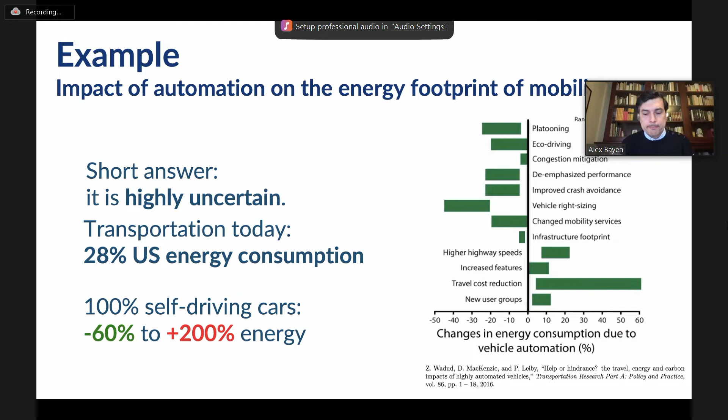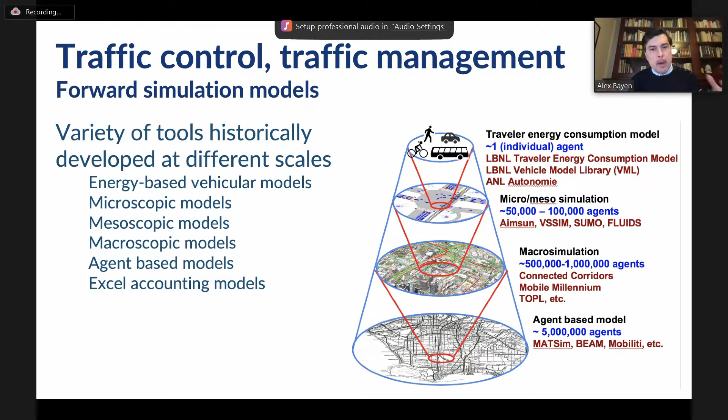The tools we use are called micro-simulation models. In this sausage-like or telescope-like diagram, you can see different levels at which you can model a city. We operate at the second level from the top, where you can do simulations containing up to maybe 50,000 or 100,000 vehicles, modeling their trajectory with acceleration and speed at a certain degree of precision, on which you can plug in energy models such as the one developed by Argonne. This is something that 12 years ago, when I last talked with this crowd, we couldn't do, because the computation wasn't there, the data wasn't there, and the modeling was still in progress. So it's relatively new, in the sense that the convergence of cloud computing, modeling, and machine learning, as you'll see in a minute, has enabled something we could not do before.

For those who haven't seen microsimulations, it's not particularly glamorous, but that's what it looks like. You can see essentially each vehicle, and the speed level, like you'd see on Google Maps. It's something which is very mature.

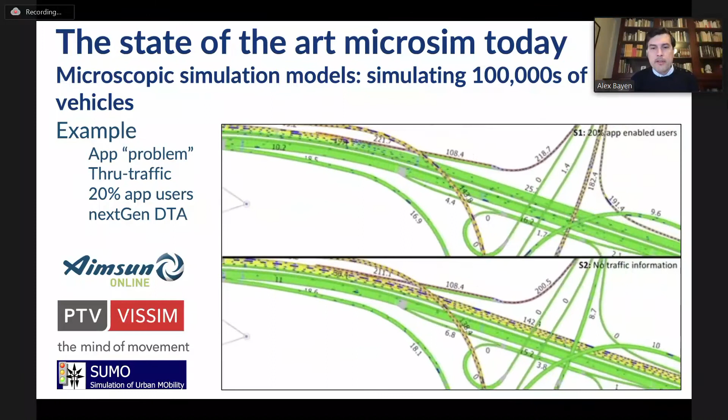There are commercial products such as Aimsun or PTV VISSIM, and open source frameworks we use like SUMO. Actually, we use two out of the three here. So this is something very mature, very established - there's 20 years of research in transportation engineering that led to the development of these tools. We take this as a commodity; we don't build them, we use them.

If you think about the big challenges of the future, data is not so much a challenge anymore, in that there's enough data now to do things we couldn't do before. There's, of course, always challenges with processing, storing, and cleaning data, but that's not really our job. There's a lot of interesting work in calibration, because even though the data is here, it doesn't mean you have all the tools to calibrate the models, and calibration of these models is actually quite hard. So there's a lot of work to be done there. Computational time is also complex, because it's okay to do a simulation with 100,000 vehicles.

But the problem is if you're going to embed that in deep reinforcement learning code, now you might need to run 100,000 simulations with 100,000 vehicles. And that is a challenge. Hence, a lot of research is happening in the field of control and deep learning with these things.

And that's, I think, where a lot of the action will be over the decade to come. So the call to action, ending this year with a large-scale experiment we're planning, is to demonstrate with a large-scale experiment involving 100 vehicles. I'll talk about this at the end. This summer in Tennessee, how concepts such as the one I'm going to derive today can be applied in practice. Now, for this, I want to dive a bit back in history.

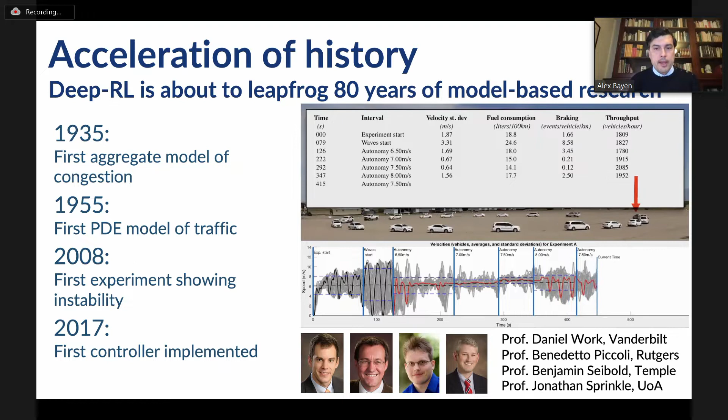So that was a turning point in our thinking, because that controller, using classical control theory, opened the gate for doing something which maybe this summer will go on the road for real.

Now, one year later, Cathy Wu, who is a professor at MIT, did this experiment in a framework called Flow that we created. She did the same ring. There's a self-driving vehicle in red. The only thing it can sense is the blue vehicle in front, and every other vehicle does what it's doing. What you see is that these oscillations are happening, and then as soon as the AV turns on the autopilot, the oscillations are removed and the ring runs smoothly.

So if you're paying attention to the presentation now, you're probably wondering, why am I showing you a simulation in 2018 when some people did an actual test in 2017? That seems like going backwards.

And the reason is: the 2017 test is a controller built on an explicit model of the cars. People went down to car dynamics, took the equations from the book, and derived the controller for it. The 2018 simulation has no model of the vehicles—it has a simulator, treating it as a black box, and it's using deep reinforcement learning to do the job. And it does exactly as good a job as the controller does.

From a historical perspective, there's been over 10,000 articles between the first traffic model and that first experiment. Then that first experiment was such a success that there was probably over 1,000 articles focused on string stability and how to shave things, leading to that fantastic experiment. But Cathy, with one article, managed to achieve the same, essentially not leveraging any of the work done in previous decades. That's a turning point, because it raises the question: what could you do with model-free machine learning? In other words, treating the system as a black box without looking inside. That was a pivotal time for us, and that's when this project started.

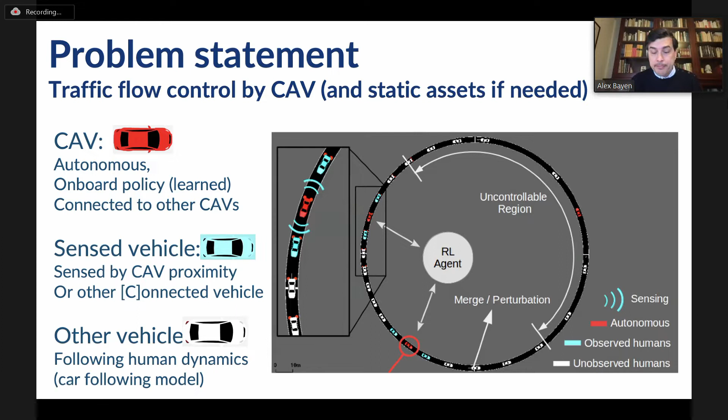We tried to see if we could generalize this. Here's an example where we figured out whether we could use the same algorithm to stabilize a double ring. It's interesting what it's learning to do here: the algorithm is learning to be a real jerk, essentially preventing cars from behind from passing by switching lanes. But that does the trick—it does stabilize the double ring.

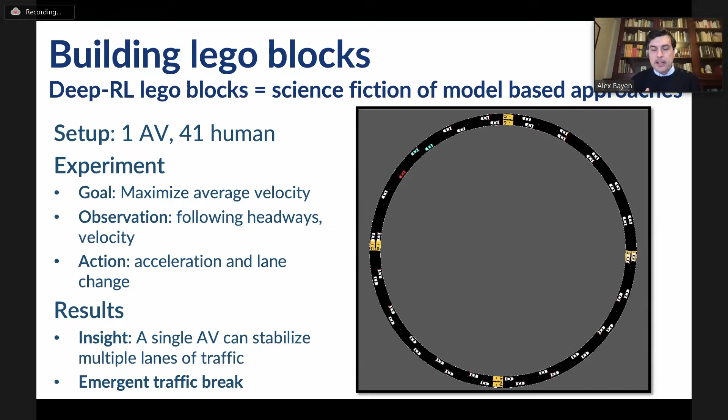You could say, what's the big deal? This is something you learn in police academy. In France we call this a snail operation—I don't know if it has a name here as well. It's a way to slow down traffic. But it's cool to see that the machine learning learned it.

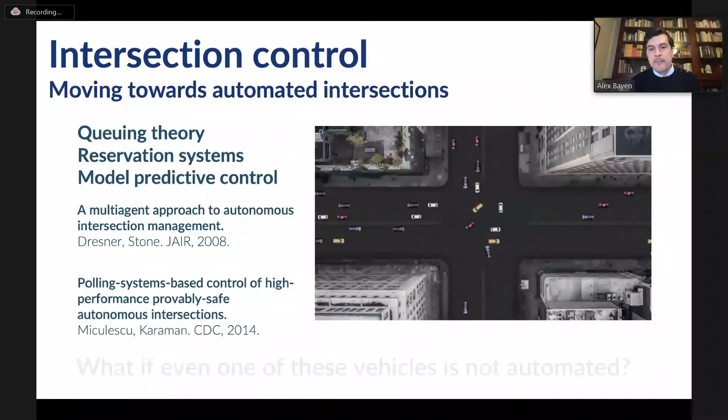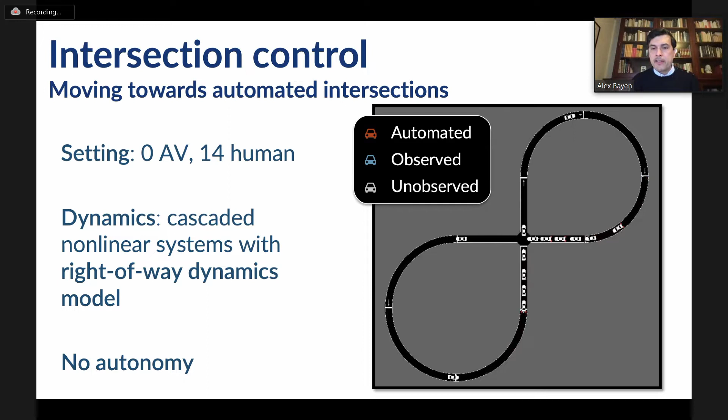Another interesting thing is if you try this setting where vehicles use the kind of California politeness stop approach to an intersection, letting the other person go when they come first—that's the worst possible way to manage an intersection, both from a throughput perspective and an energy perspective, because you stop and go. Here what the algorithm does is interesting: it learns how to pick up the right speed so that the length of the snake created by the platoon is exactly half the length of the loop, and by that it can go as fast as possible without stopping. That's another thing the system learned without a model.

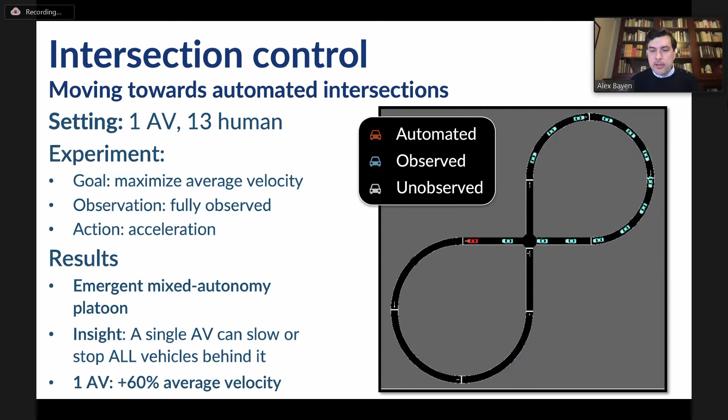Essentially, you just use the simulator for that. So you could argue this is interesting—it kind of learned to platoon in some ways, or it learned to adjust the speed optimally.

Now take this example, where again this intersection is managed in a very poor way, with cars taking turns—really the bad way to do it. If you apply the same algorithm, I would have a hard time telling you what it's doing. It's kind of stopping, then going, maybe stopping again. I could invent a great story and put it on Fox News, but the truth is I really cannot rationalize it, even with interpretable AI—it doesn't give a clear story to tell. That's interesting, because the algorithm came up with something that isn't really intuitive. A human probably wouldn't have figured it out, but yet it does much better than the other settings.

So you can do a lot more with this. For example, you can do transfer learning, where you learn on the ring and then deploy it somewhere it's never seen before, such as a merge. What I showed you before was learned on the ring, so now the policy is on board that vehicle, and then you apply it to the merge.

So what's the problem with the merge? Every once in a while there's a vehicle coming in on that little road, and when that happens it creates a jam that propagates backwards. Now you have back-propagating waves, and here come the instabilities.

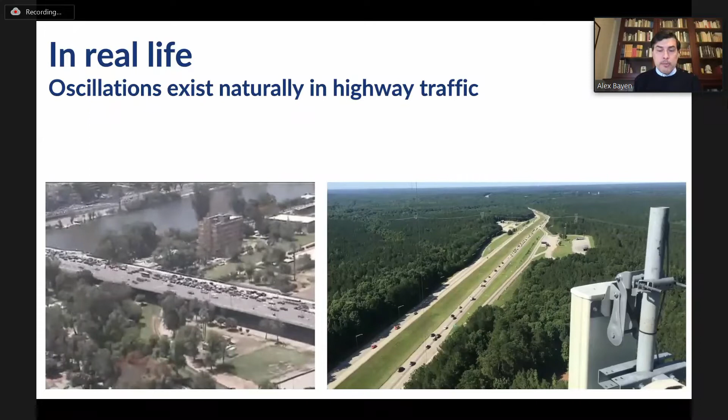That was the launch point for what we're doing this year. We've been working on this for three years now. Our target is real shock waves on real freeways. You can see they're happening here, and they're not happening because there are too many people on the road - freeways have some congestion, but that congestion is not due to excess demand, it's due to people being bad drivers. There are things where automation is better than humans, and things where it's worse. We believe this is one of the things where automation will beat humans by a lot.

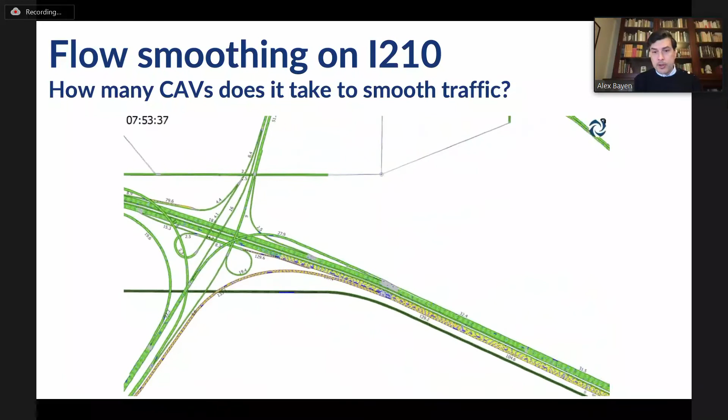So we started learning these models on the model of the 210 freeway in Los Angeles, because that's a fully calibrated model we built 10 years ago for the California Department of Transportation. There were years and years of data cleaning and management involved in creating that model, so it was a high fidelity model. And the way things look when we deploy it on this model is the following.

I recognize there's a bit of a stroboscopic effect over Zoom, so you might not be able to see much, and I'll try to narrate what you should be seeing if you were sitting here in my room. Right now you see a bunch of vehicles in white - normal vehicles - and vehicles in red, vehicles with automation. But right now the algorithm is not turned on, so you can see the density in the little box is very high. If you look at the outer box, you'd see waves propagating back and forth. I realize that's hard to see over Zoom, so just believe that you see waves, I see waves.

In about 10 seconds, some cars will turn blue, and when that happens, it means the autopilot in the red cars is kicking in. When that happens, you'll see the waves disappear, but the throughput will not change massively. So here we go - if you see some blue vehicles, that means the red vehicles are now acting, and the waves, if you were able to see before, have disappeared. The total number of cars that go through is roughly the same, and the total time vehicles take to go through is also roughly the same. We're not solving congestion - we're just dealing with it in a way that people don't have to stop and go.

And beyond the obvious energy savings, stop and goes are also known to be the major producer of accidents on the road. So there's also safety benefits that come from this.

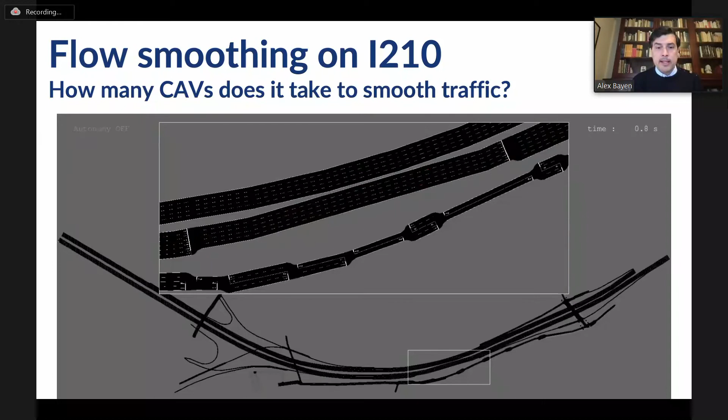So that's the concept we're trying this summer in Tennessee. Right now, I'm showing it for the 210 for historical reasons, because we had good models, but that's what we're going to deploy in Tennessee over the summer. So the goal here is there's a test bed in Tennessee on the I-24. This one that I showed before is on the I-210 in LA.

And our objective with the I-24 is to shave these waves. My colleague and former student, Dan Work, is working on the I-24 motion test bed. It's a $15 million test bed deployed by the Tennessee Department of Transportation, where they have poles every 500 meters with high-resolution 6-pack video camera systems to monitor everything on the freeway, so we can do a before-after analysis and completely uncorrelated data analysis to demonstrate the benefits that we claim we will be able to achieve with these algorithms.

And so when we train the algorithms, the idea is that essentially the reward is a form of the negative of the energy consumed, but we do have to add a few tricks in there, which I won't have time to describe today, because if you do that, the obvious solution is to stop everybody - by that time, you consume zero energy. So obviously there needs to be a little bit more to it, and maybe more on that later if we have time.

There's also interesting things we do with imitation learning where - I was a bit radical before when I said we don't use models. I mean, at the end, we don't want to throw in the garbage 80 years of research in traffic modeling. So we also do develop explicit controllers.

And the interesting part is that with imitation learning, we can learn them through a neural net. And once you learn them, you can learn a family of them, and then you can learn them in a way that maybe you don't need as many inputs as you would otherwise. Many of these explicit algorithms require measurements of speeds at various locations on freeways. But with imitation learning, if you learn a family of them, maybe you don't need these measurements.

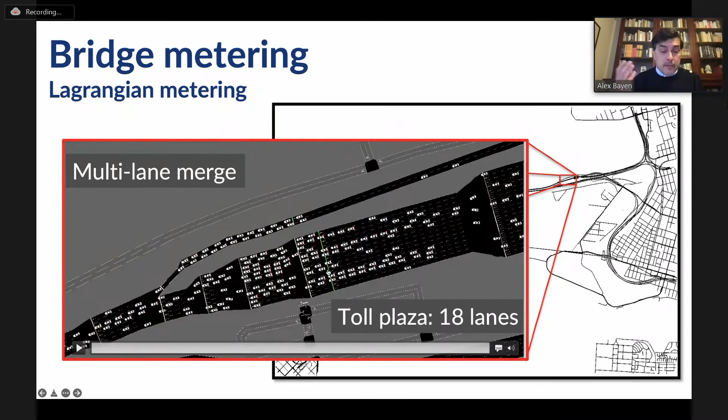And that's kind of another idea we have. When we work with systems like the Bay Bridge, which right now we're just doing in simulation, the idea is that these metering lights are effective. They've been running for 40 years. In fact, some of my predecessors at Berkeley did the very first algorithms that went on it. But with distributed control, similar ideas like the ones I've shown before can be used to do distributed metering, in which essentially cars selectively hold vehicles before the choke point, thereby in a sense prolonging the time before the choking time. That's something, once we're done with our Tennessee test, we might try in the future.

Now, before we went to the field and tried it on real vehicles, we wanted to try it in hardware. So I went to the University of Delaware with my good friend, Andreas Malikopoulos. And there we worked on sequencing problems.

So we tried this on a variety of hardware platforms. This is at the last CPS meeting right before COVID, and the students are Fangyu Wu and Eugene Vinitsky, right here. And then before I want to talk a little bit about this Tennessee test we're doing now, I also wanted to show that there are other branching out interesting avenues here.

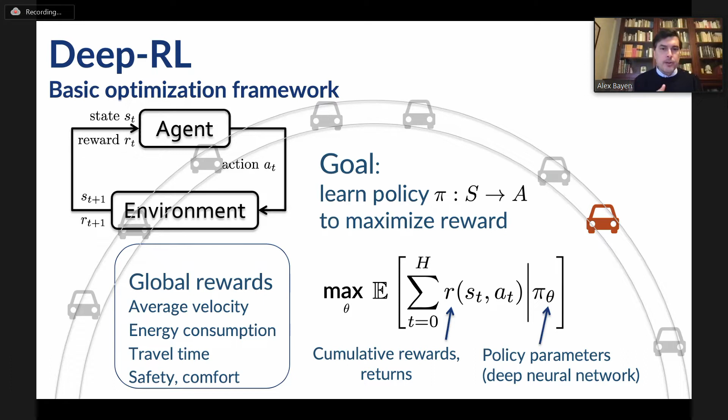So of course, there's a lot of work to do. We're not done with that, and now I'm going to return to the physical world and show you what we want to do this summer.

The framework we built is an integration of three things, which when we launched it in 2018 was really new and had never been done before. It was the integration of a micro simulation, Sumo and Aimsun, we had two at the time that we used, on the cloud, so AWS at the time. And we were integrating this with deep reinforcement learning libraries that were coming out of the AMP Lab and other places. In fact, Aimsun built a special version on the cloud for us.

Before that, it was running on old stacks of hardware, and we were the first use case for them to run on the cloud. This was built for flow, and of course, it's great now because they also run on the cloud, which improved their customer base.

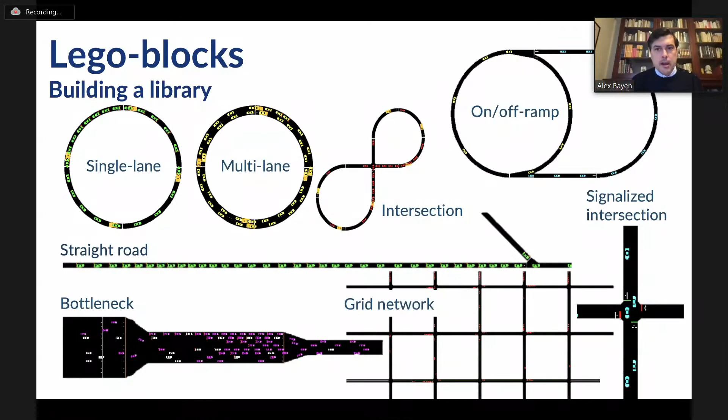So this is the framework we're using to train our vehicles. We have these Lego blocks that we're using to train them on more and more complex things. We even created a form of Mujoco of traffic, which we launched in 2018 at CoRL.

And now we have a software architecture that is professional grade. We have three OEMs that work with us on it: Toyota, Nissan, and GM. And we have a leaderboard in which we can compare the algorithms.

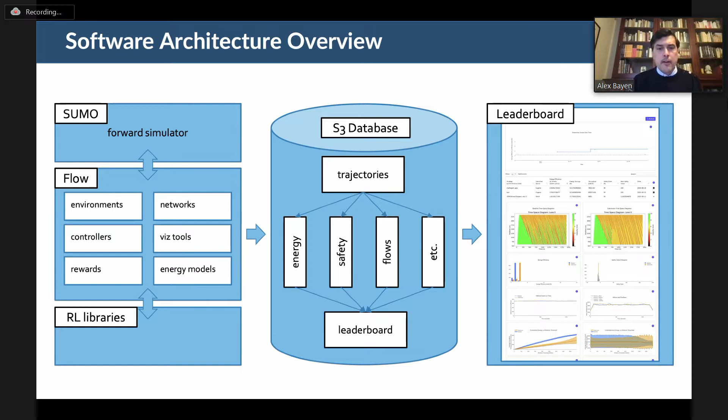And that's the pipelining we're using for the test we're running this summer. The pipelining essentially enables us to compare algorithms and, in particular, see how they operate in different settings. We can even see their evolution over time, so that when we go to the field, we have the ability to launch ones with specific features we like.

We have a user community. I'm going to skip that.

The team has grown a lot since we started. We have 5 universities, and I mentioned 3 OEMs. Our base of deployment switched from California to Tennessee. We're still going to test in California with the 680, but most of the deployment work will be on the I-24 MOTION in Tennessee, and I'll explain why in a minute.

For those of us still in California, we're also working with the California Department of Transportation, as well as the Contra Costa Transportation Authority in Danville, because there's interest in maybe using more advanced features of V2V, and that's something specific to Nissan.

But in the meantime, the main deployment in the summer is going to be on this stretch of the 24 in Nashville. It's a crazy freeway. There's an accident almost every hour. People behave very aggressively, and there are a lot of waves also due to the topography. So it's a good testing ground for us, even though, of course, that's very stressful.

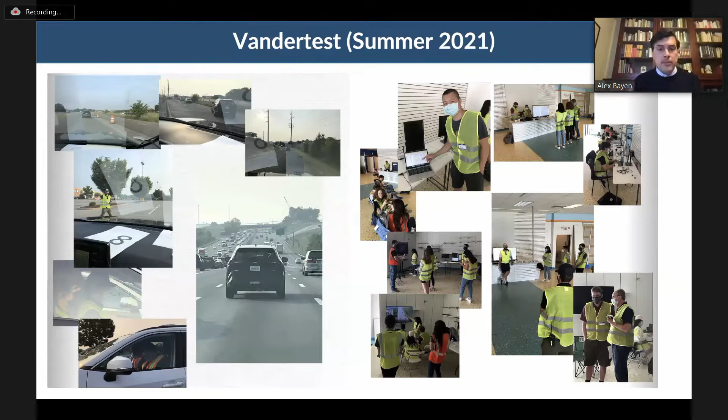This is what the team looks like. If you were picturing this from a helicopter, when we do one lane, we have a self-driving vehicle, level 2-ish with our automation. Then a bunch of people come in and out doing crazy things in the middle. Then we have a sensing vehicle, then again crazy people doing their things, and then the second one, and then again people, then sensing vehicle, etc. This is both for testing purposes as well as for calibration purposes.

So we have different scenarios. We've tried this on different lanes, and it was very stressful because this is the first time. You have to be very careful with your algorithms, especially when people cut in front of you. Algorithms have a tendency to overreact, and that can be very stressful. So that was very helpful.

Engaging stakeholder groups across numerous sectors who provide input for ideation through a range of visioning activities. ERVA's diverse network of allies - government labs, professional societies, nonprofits, students, educators, industry associations, venture organizations, and champions of the future of engineering research - provide the brain trust that fuels the ERVA engine. To build collaboration, spark next-generation ideas, solve our grand challenges, protect our resources, train the workforce of the future, and create a vision for engineering research leadership that will unleash discovery and innovation and increase prosperity. ERVA, the Engineering Research Visioning Alliance.

Hopefully with this video we were able to tell you a little bit, on a higher level, what ERVA is all about. I'd like to now bring this to your attention a little bit more and explain why I'm here, what I would like to see ION do, if possible, and how we can work together to essentially fulfill the mission of bringing forward new engineering research ideas and shape the research program in this country.

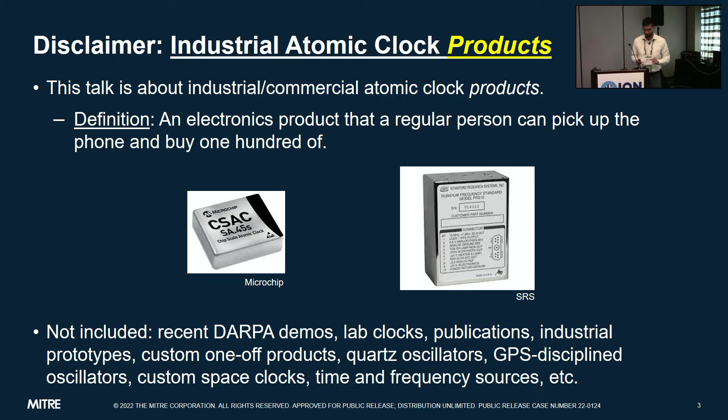Of course, those products are a subset of a much bigger class of systems, the whole slew of atomic frequency standards.

Thankfully, since we're at ION, we don't really need to justify the role of atomic clocks. This is well familiar to anyone attending a PTTI conference. Atomic clocks underpin many different aspects of how we function in modern society, from navigation to communications, sensing, power grid, financial transactions. All of these are enabled by time and frequency from atomic clocks.

And that's not special. There are a lot of other products that have revolutionized the world, changed the way civilian and military life operates. What's special about clocks, though, is the number of clocks used to have this global impact. So again, clocks aren't special — there's a number of physics-based, Nobel Prize-winning physics innovations that have changed the world.

Here's my short list: transistors, lasers, digital cameras, fiber optics, LED — there are a lot of things. The world is different now because of these things. But atomic clocks are different, because for most of these you need the thing at the point to do the thing you're talking about. Transistors, for example — you need a lot of transistors at the location to do the thing. Clocks are different because time transfer is good.

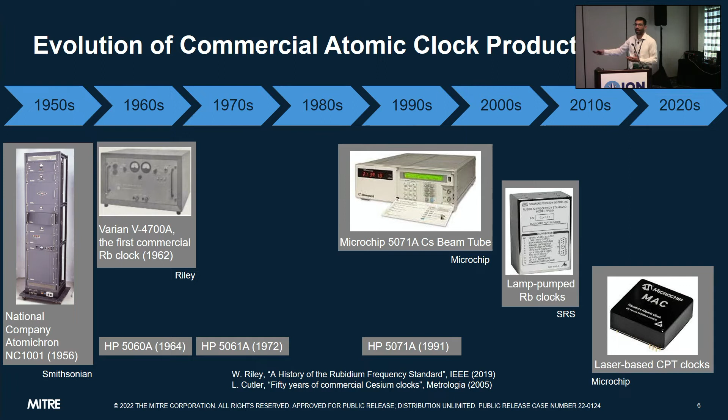What we'd like to be able to do is compare these clock products — not longitudinally, not over time, mostly because we don't have great access to many of the old data sheets — but vertically. So I take a snapshot of the field at 2020 and look at how different products compare to each other. And so we set out to be able to do that.

What we tried to do when we started looking at this a couple years ago was come up with this global quality factor for clocks, this goodness parameter. What we wanted to do was plot a single metric related to clock quality as a function of a single resource metric.

And we got stuck, because there's not a great way of doing that. Different applications require different quality parameters — some favor short-term stability, some long-term; some favor time error, accumulated time error, or low environmental susceptibility. There are many different kinds of quality factors. There's also not a single well-known resource metric. Some applications require low size, for some power is most important, for some cost is the most important thing.

There's not a great way of doing this simple apples-to-apples comparison. But it's our job, that's what we have to be able to do as a community to make these comparisons and to track our progress. So we're going to try to do it, even though it's imperfect, with the solution we've arrived at.

The problems we came up with: there's no single cost function, no single performance metric. Even if we had this, what time interval to use? Am I looking at stability after a second, a day, a week, a month? Different applications require different time intervals. What environmental profile to use? It's definitely not fair to look at a clock at room temperature if you want to put it in the field. It's also not quite fair to evaluate it from minus 40 to plus 80, some enormous temperature range, because many applications don't span that either.

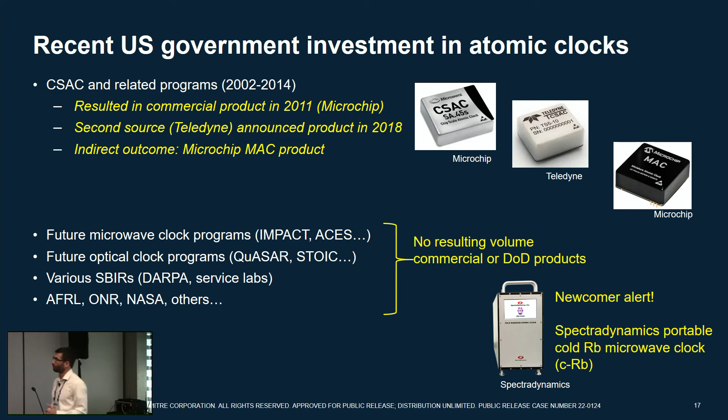And I'm kind of mixing US and global here, but we'll focus on the US. What's getting pumped into that to keep that alive? US government investment at the tune of around, let's call it 20 million a year. Let's just linearize it, okay, 400 million bucks over 20 years. Industry is also investing. Industry has an R&D budget. It's small, I have no idea what it is, and they probably won't tell us anyways. But industry is pumping some money into that. These are the inputs into the box.

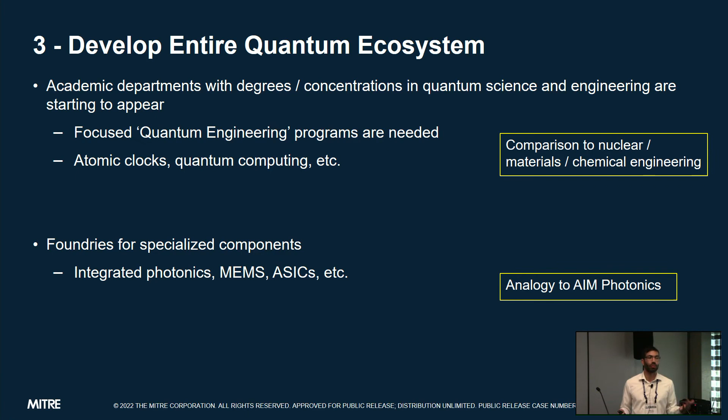Pick an atomic clock—I just made fun of two of them, SpectraTime and Microchip. These are rubidium clocks. You have 4 pages of information. It's okay, tells you a little bit about what happens. There's a single number for linear drift, as if everything follows that. A TEMPCO is given over an enormous temperature range, and it's not clear how linear that relationship is. A standard way of measuring retrace is not given. A lot of information is missing.

Now go to a single op-amp, Analog Devices OP27, a famous op-amp: 20 pages of information. 6 beautiful pages of graphs of how an op-amp performs over voltage noise, current noise, temperature variations, or shock and vibe—anything you want to know about this op-amp is here. In an earlier draft, I actually had slides of the op-amp charts because it was so much information. But we can't do that for atomic clocks, I think just because no one's asking for it.

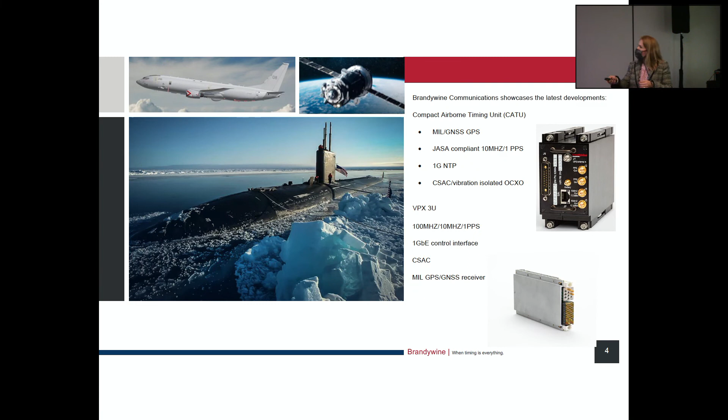Good morning, ladies and gentlemen. My company, GuideTech, has been in business since 1988, designing and manufacturing frequency counters and time interval analyzers.

The greatest thing that we pride ourselves on is the sub-picosecond resolution that we provide over many channels, all synchronized to the same master clock, so you can test them against that one master clock and against each other. We have some very happy customers in the crowd, some of which, like Demetrius here, can attest to that.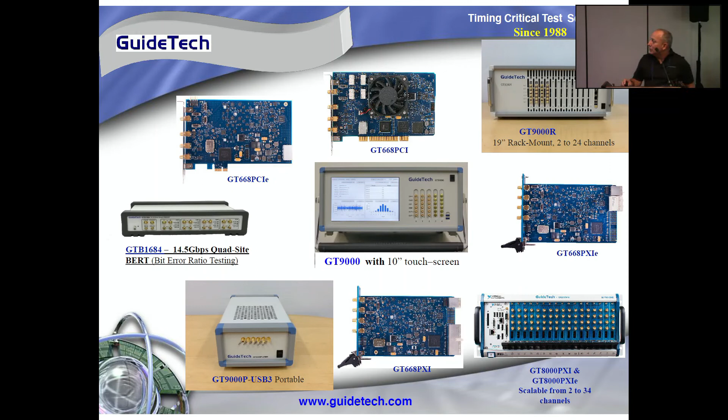This is some of the product lines that we have. We sell systems as well as cards, instruments that you can plug into your PC, download the drivers, and have it on your PC computer. We also have a portable unit that you can take to the field.

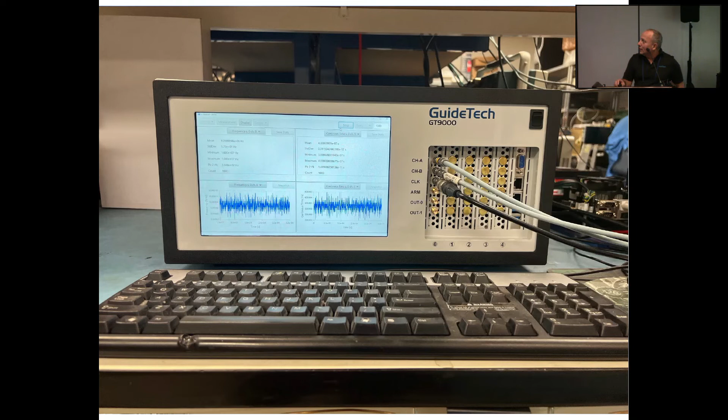This year we've introduced the new chassis of the GT9000, which are the new and improved chassis. You can see this one with a touchscreen display, and this one is a rack mount that you can scale up to 24 channels.

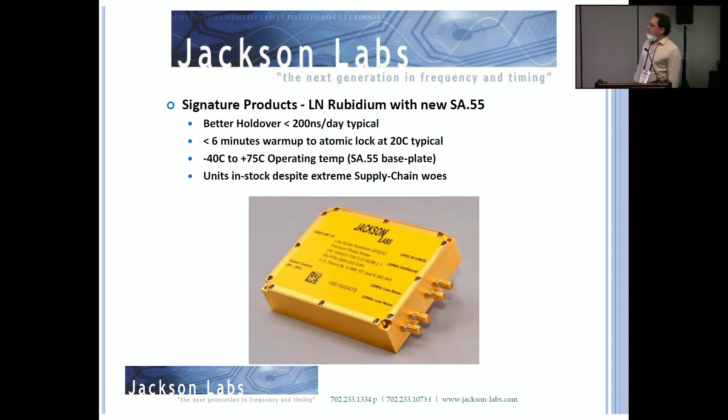Moving on from there, we've introduced our PNT 6XXX chassis, which is an assured position, navigation, and timing unit. We do most of what we do in the timing domain, and positioning and navigation is something that falls out of that, which is kind of different. Any kind of GPS receiver you buy, unless it's dedicated, focuses obviously on position and navigation, and timing is an afterthought. We go about it the other way around.

It's a half 19-inch rack mountable unit, so you can put two of them next to each other. It has an IEEE 1588 Grandmaster and Slave built in, double oven, rubidium, chip-scale atomic clock, or even a TCXO for very low-cost, high-volume applications.

And it has as a bonus a Satelles low Earth orbit receiver front end that we're showing at the booth as well, which is a very unique, path-paving new product that allows you to get assured position, navigation, timing, latitude, longitude, and height from a low Earth orbit constellation rather than a GNSS constellation. So it's the first commercial product out there that does that, and it allows you to also go into some non-military applications.

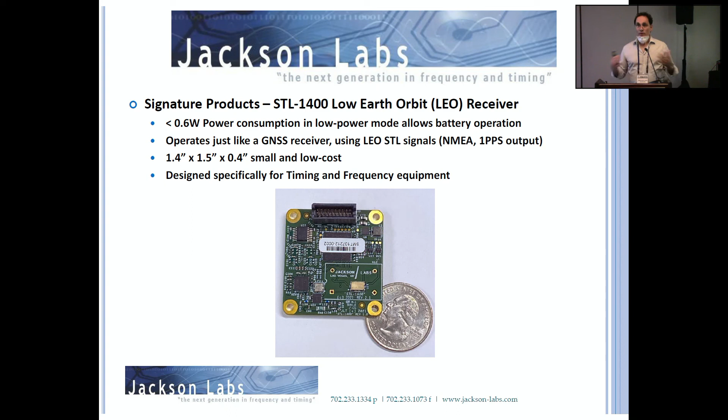Hello, I'm John Clark from Master Clock Incorporated. We are keeping the world in sync out of St. Charles, Missouri, that's suburban St. Louis. We were founded in 1994 by my parents in our home garage, and from there we grew into who we are today. We've got our headquarters there in St. Charles, as well as a development office out in Sunnyvale, California, just up north.

Global distribution and support - we've won awards for our exports as well as some of our innovations, and we're happy to hopefully continue the trend.

What we're known for is our own in-house manufacturing and development. People can bring us problems, and we can iterate them through very small quantities until we get to the final product and then build from there, working in concert with them on everything from hardware, firmware, software, and all the other add-ons.

Custom integration application specialists - we find a lot of people that talk about what's cool, what's new, what's late and great, but back in their lab they've got 35-year-old equipment with legacy protocols, and we specialize in integrating those in and providing a full path forward for the whole system.

And then of course consulting, support, and optimization services. How do I do this? Why is my client behaving this way? How do I benchmark how my system's operating? We take a combination of our manufacturing know-how as well as just experiences in the field over all these years to bring good solutions. And we like to save time, so that's my presentation.

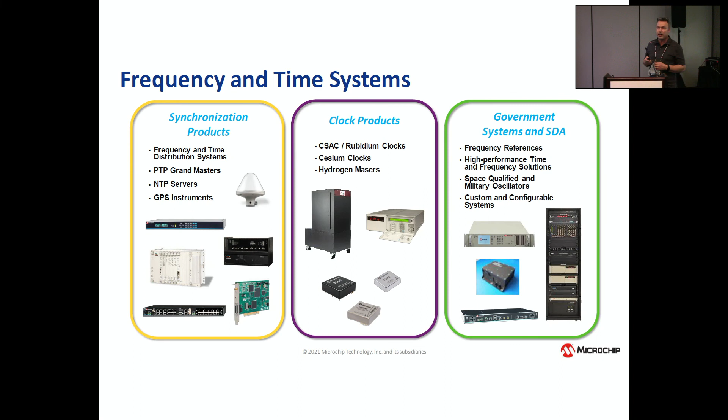So we've got a couple of demos at the booth. We will show you some of the atomic oscillators that David talked about, those low SWaP atomic oscillators. We have those on display, and we can show you how they work. We also have a phase measurement system there, which is a great way to measure those atomic clocks, and that's a great product that we offer.

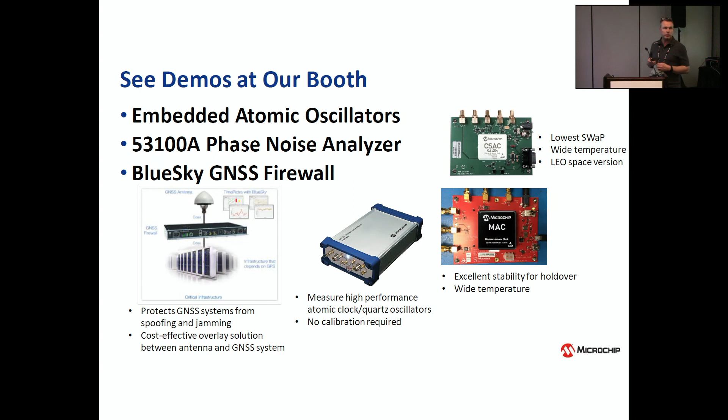And then we've also got some capabilities called Blue Sky, which is a way to quickly, effectively, and cost-effectively protect your infrastructure from jamming and spoofing of the GNSS signal. So please do come by and see us. Thanks very much.

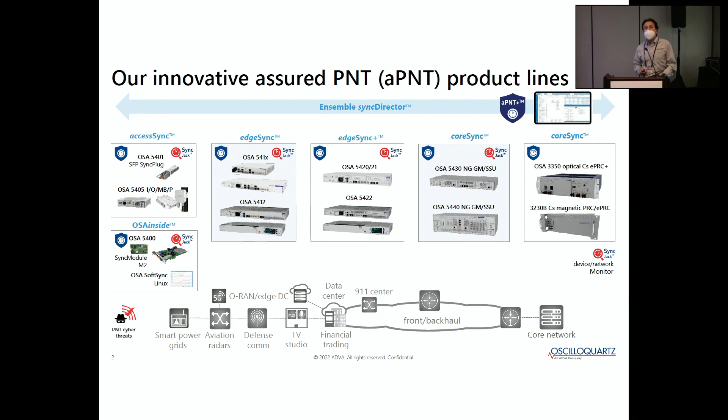We are a European-based company with our roots in former Philips Test and Measurement. We were a division for time and frequency competence in Stockholm, Sweden, starting in the 1960s. We have 60 years experience. Now we are an independent company, spin-off from Philips in 1998.

Global company selling all over the world. In the US, we have been pretty successful by serving the US Air Force, Army, and Navy for 30 years. Our product range is time and frequency reference, counter analyzers, frequency distribution.

And then we have two new product lines acquired last year, which really don't have anything to do with time and frequency, but it's just to broaden our portfolio. We acquired two Swedish companies called FLC Electronics, making high voltage linear amplifiers, and a company called Detectus, making EMC scanners for pre-compliance testing.

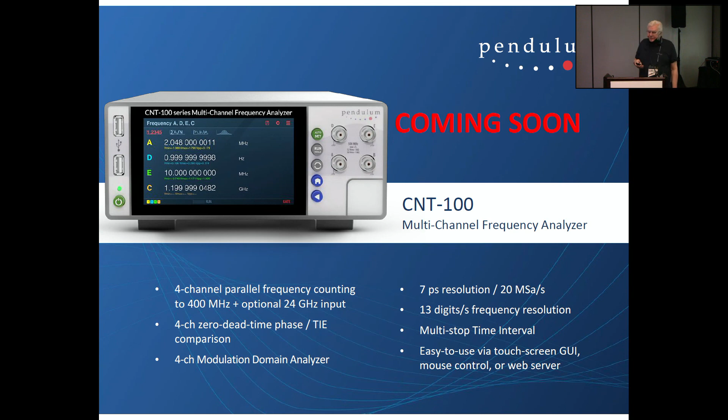And these are the 4 presentation modes you have with this counter. Come visit us in booth number 1 if you want to know more. And thank you for your attention.

Good morning. It's great to see everybody after 2 years. I know it's a small crowd, but I'm very happy to see everybody. I want to give special thanks to Michael for taking our presentation at the last minute. We weren't sure whether this was actually going to happen, and our plans were undecided until the last minute. But we're glad to be here.

My name's Francisco Ascarrunz, representing Spectra Dynamics. We're a small company located in Louisville, Colorado. We make instrumentation for time and frequency applications. That includes distribution for pulses, for timing, frequency distribution. We make microsteppers for timescales or for special synchronization applications. We have a variety of synthesizers, from RF synthesizers to microwave synthesizers.

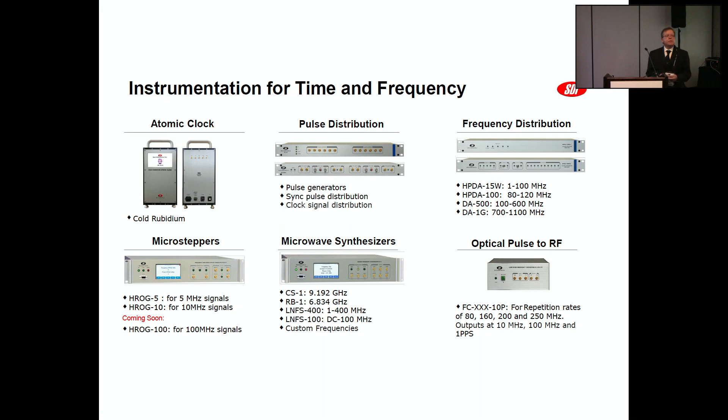Please stop by our booth, number 20, and we have a small demo. It's not the real thing because they're too expensive at the moment to risk bringing to the conference, but maybe in the future we will.

So it's a small product. As far as a cold atom clock goes, it's a 40-liter box about the size of a desktop computer, and it features no appreciable drift over the long term, so it's a little bit different than Masers. And the performance is about 10 times better than the 5071.

So please stop by. I can talk to you a little bit more if you want to know how it works. I can provide a simple explanation. Thank you.

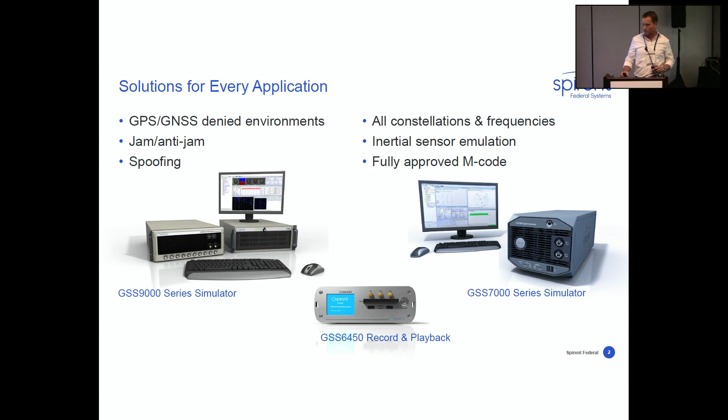We've got a range of products to suit various applications. I'll let you read the bullet points here. We do serve and work with our customers from industry, from government, from all walks of PNT. We do have a couple new things on the booth this year. We're a small group, so take a minute to pop on in there.

I realize the food's not in the conference hall this year, but we'll be there. And we've done a fair amount this past year with alternative RF navigation. Some folks are doing some interesting things in the LEO space, so we've been addressing that and teaming with some folks, as well as portable simulation. We've got a portable simulator that's found its way onto a few platforms, moving platforms, some airframes, and some land vehicles.